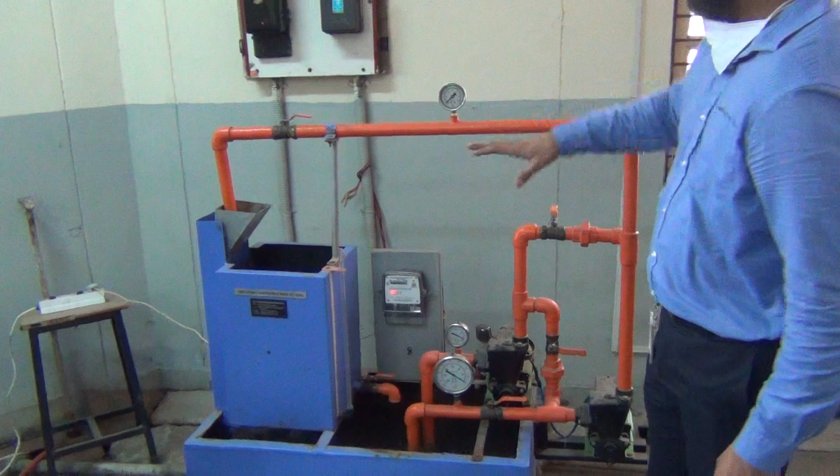System for single acting. This valve is open, this valve is closed, this valve is closed. The water is flowing in this pipe only. So this is a single stage centrifugal pump. So first of all, we can adjust the delivery pressure. So we can adjust the delivery pressure with this valve

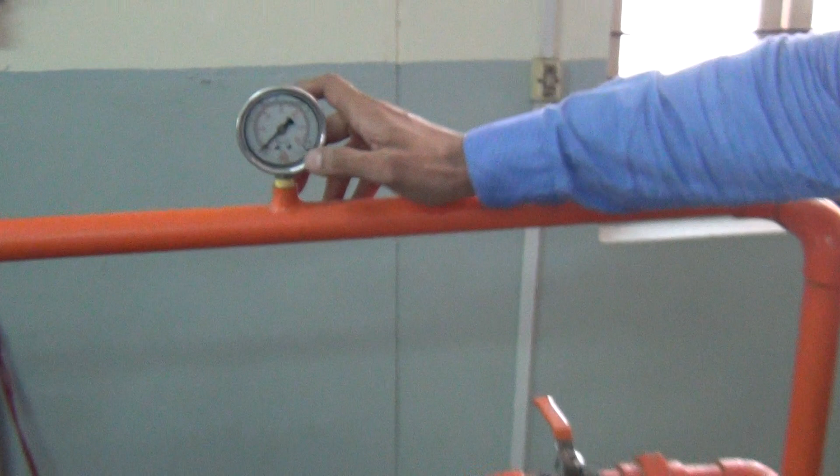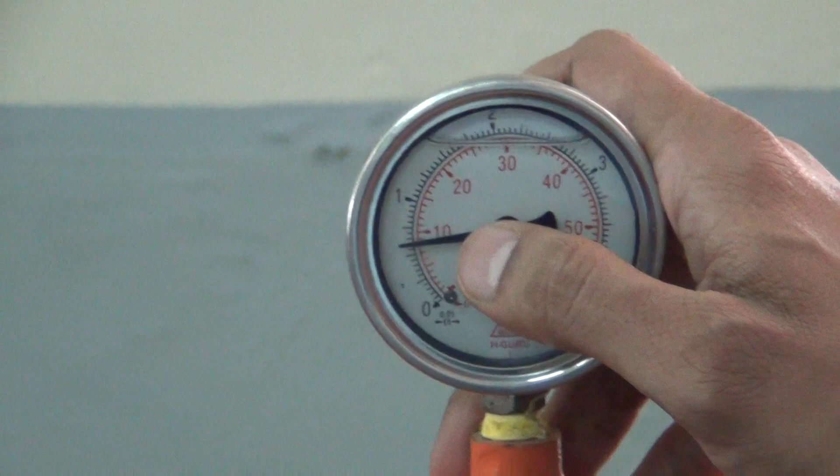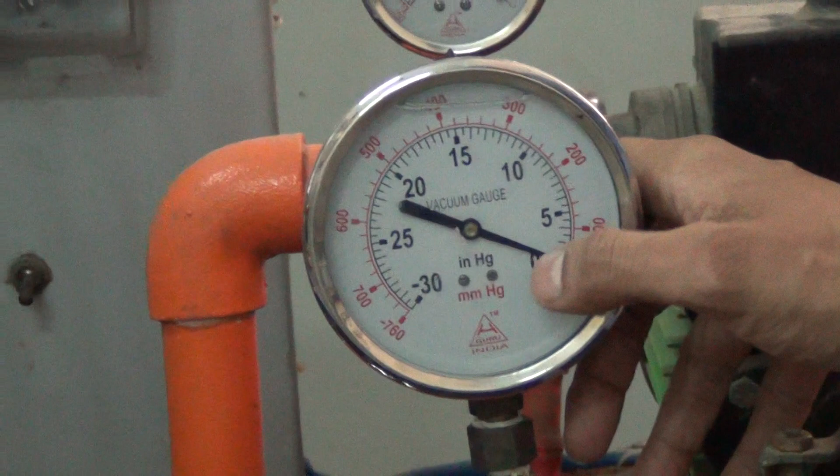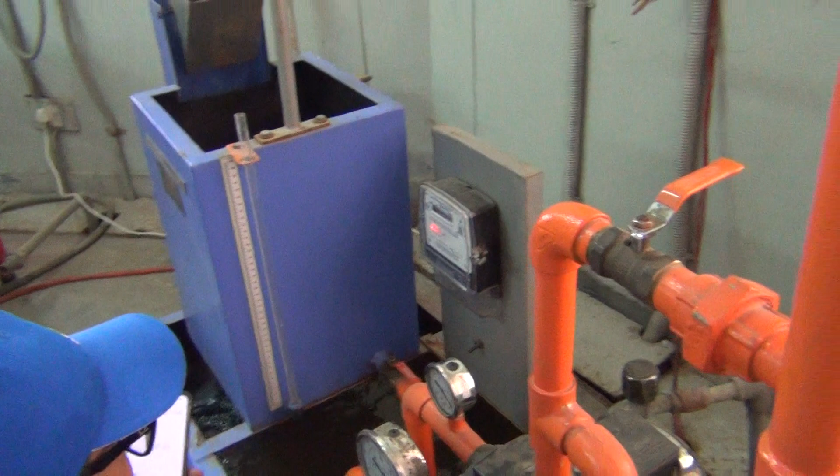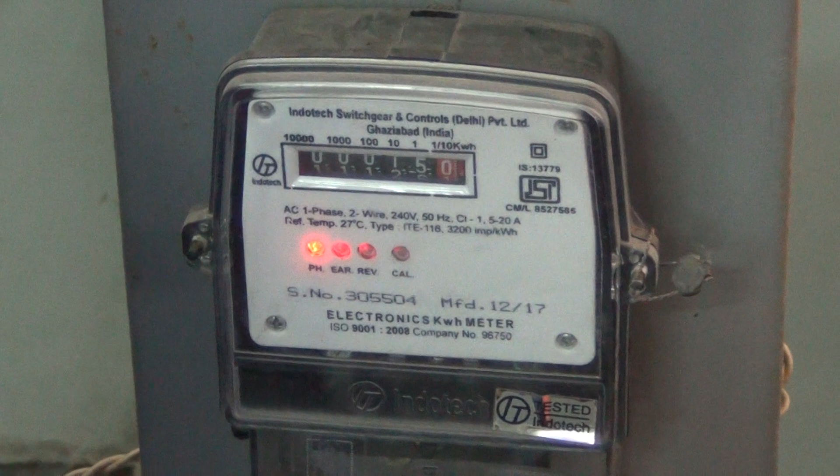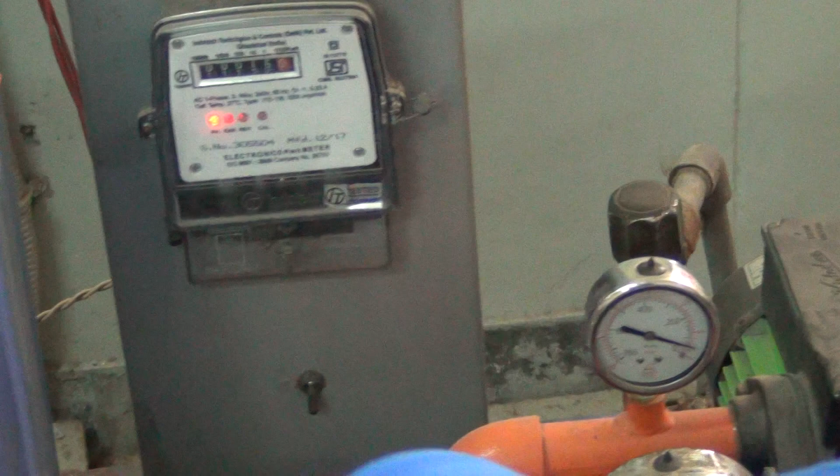Now we are measuring the time taken for 10 impulses. 30.25. Now we have to measure the time taken for 10 centimeter height rise in the measuring tank.

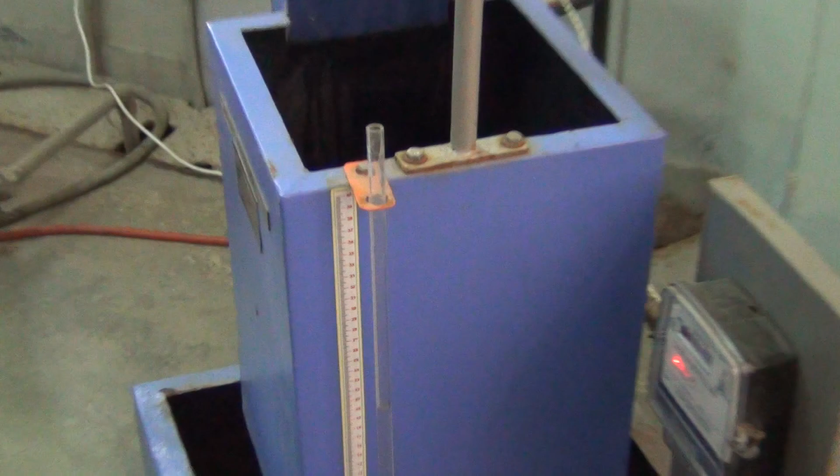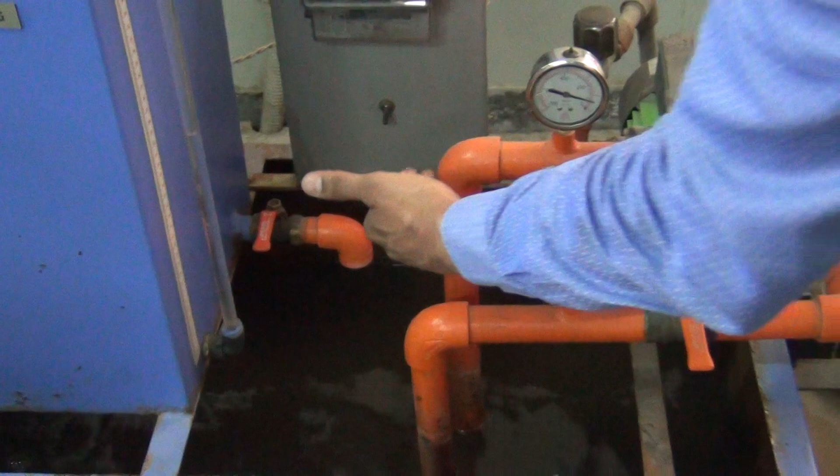In series, we can close this valve, we can open this intermediate valve. Now in this case, the water is sucking from this pump and the outlet of this pump is the inlet of this pump. Because we have already closed this valve, the intermediate valve is open. Now this system works as a pump in series.

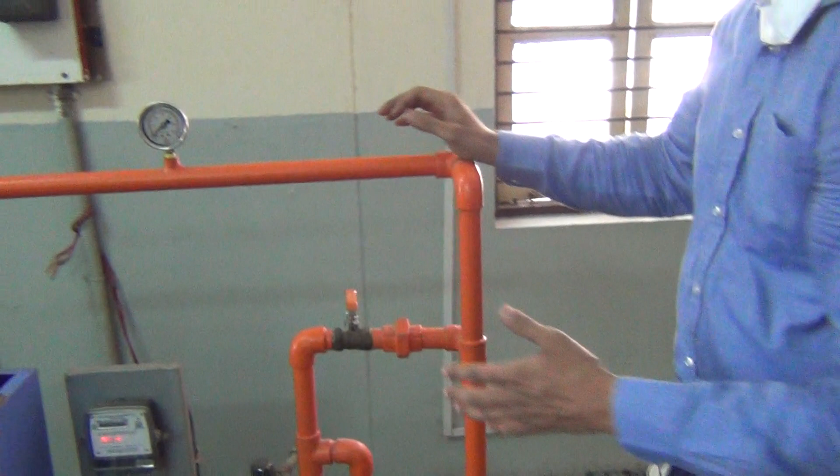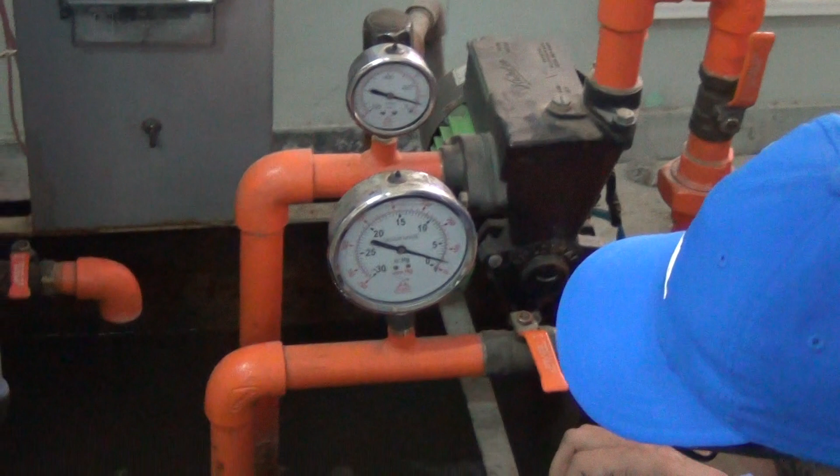So pump in series is used for high head. Means if we require the high head, we can use the multi-stage pump in series. So in this pump, we can adjust the pressure 0.5. Same delivery pressure, that is 0.5 kilogram per centimeter square. Vacuum pressure, that is

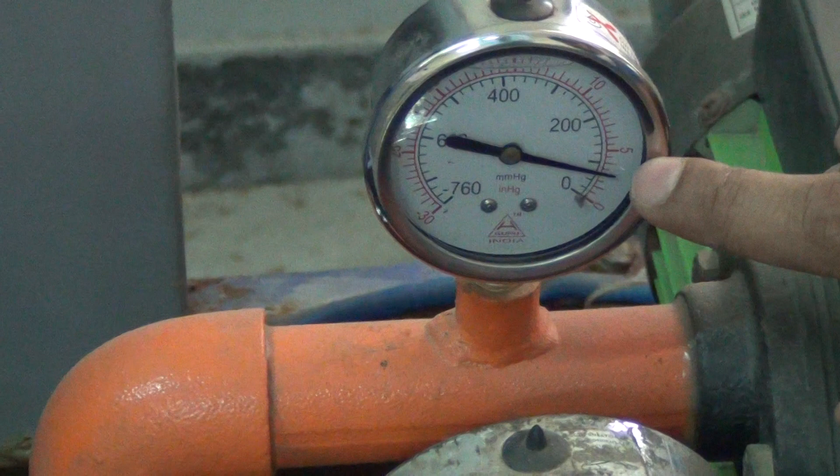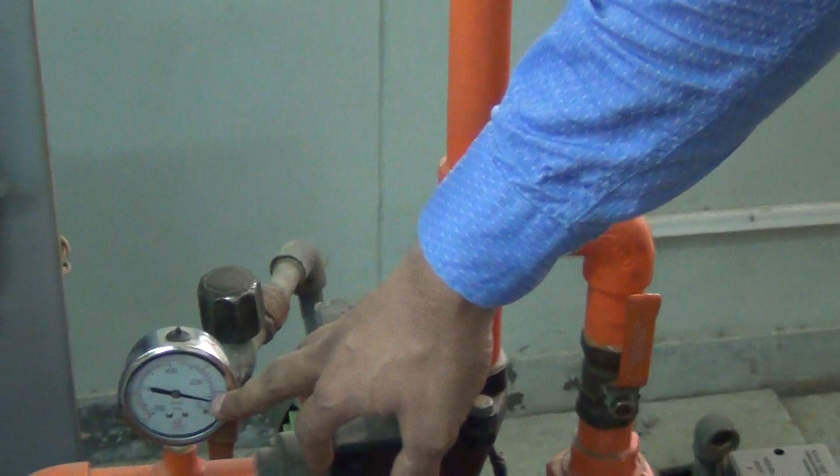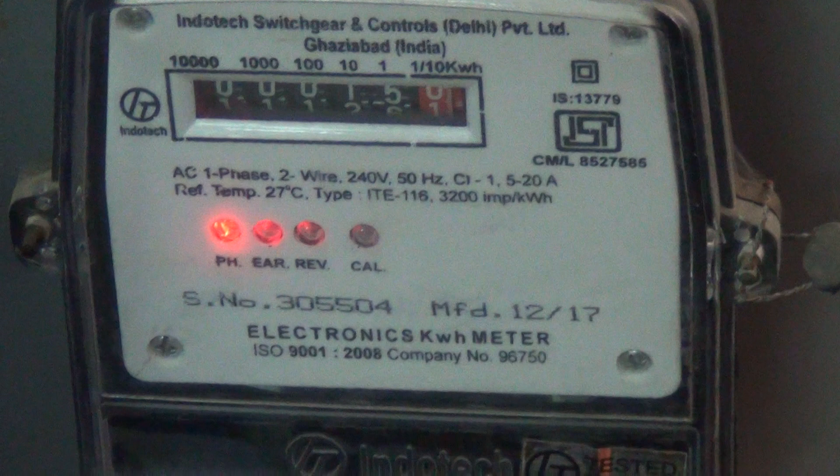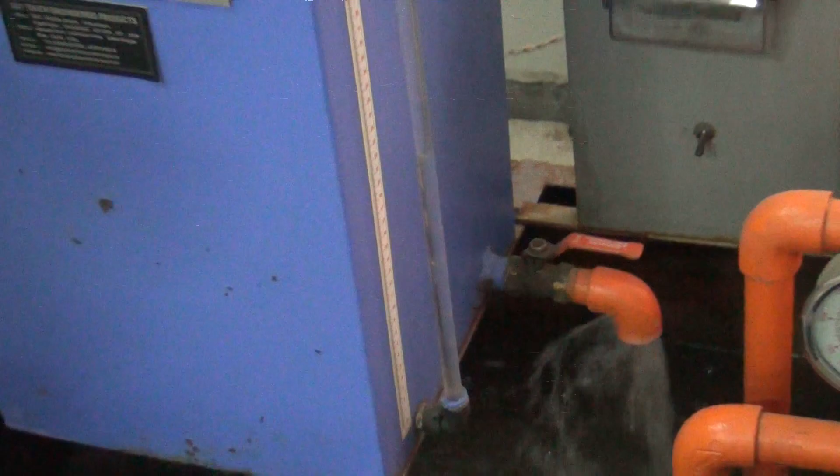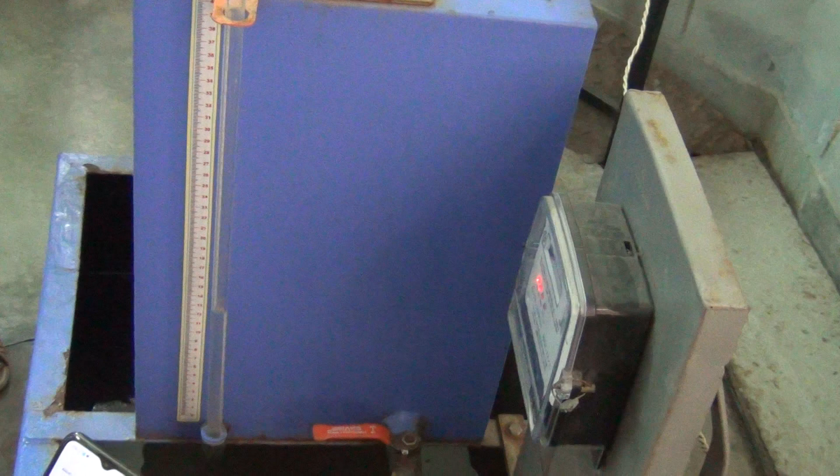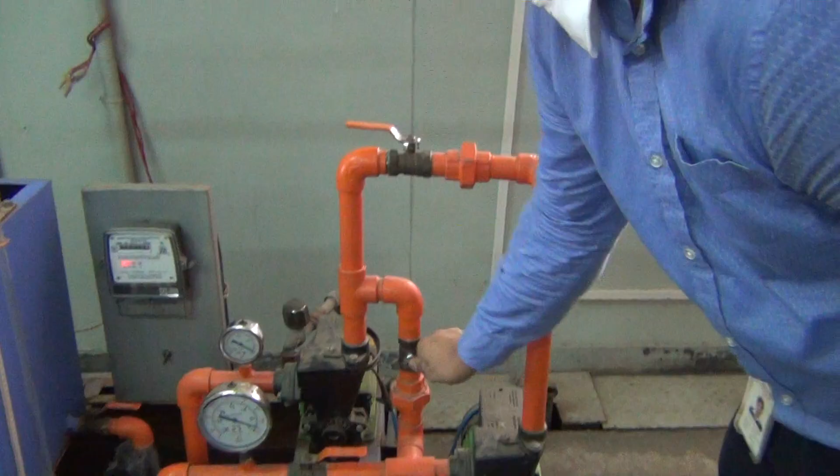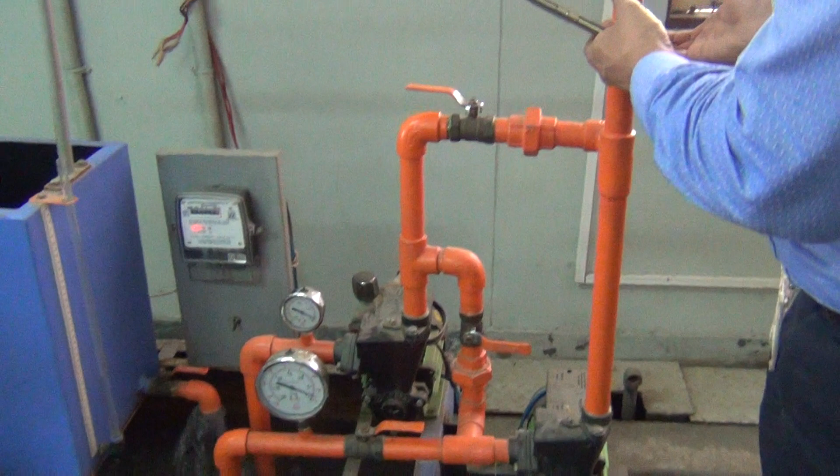And this valve is closed. In this case, this pump sucks the water from the sump and this pump also sucks the water from the sump. Then the combined discharge of both pumps comes here, then we can find out the discharge. Now we can again adjust the delivery pressure. 0.5, that is 0.5 kilogram per centimeter square delivery pressure.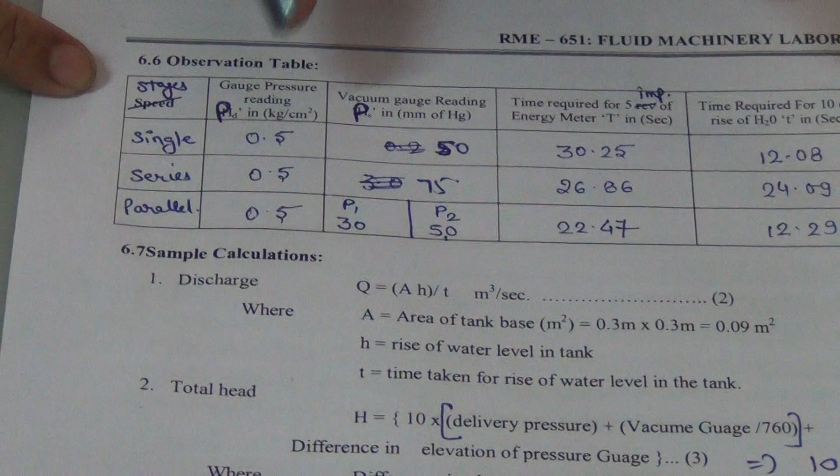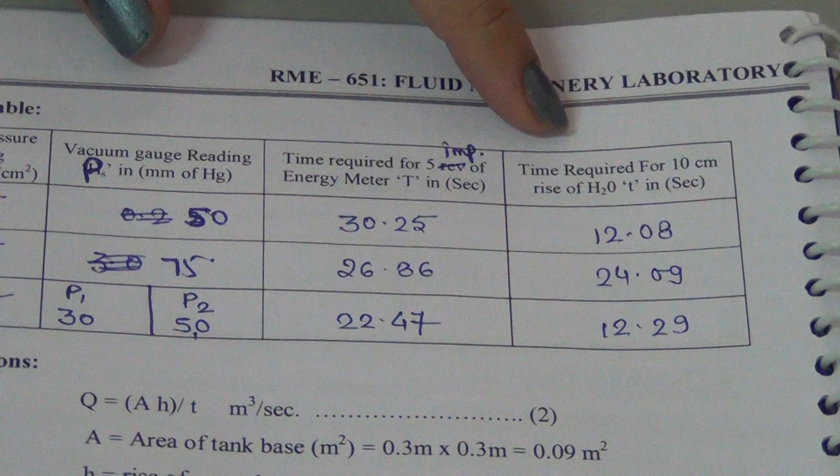So these are the readings. Centrifugal pump. Here the observation table consists of 4 columns. First one is gauge pressure, second one is vacuum pressure, third one is time required for 5 impulses of energy meter, T in seconds, and fourth one is time required for 10 centimeter height of water, that is small t in seconds. In the first column, as we know, we have gone for 3 readings.

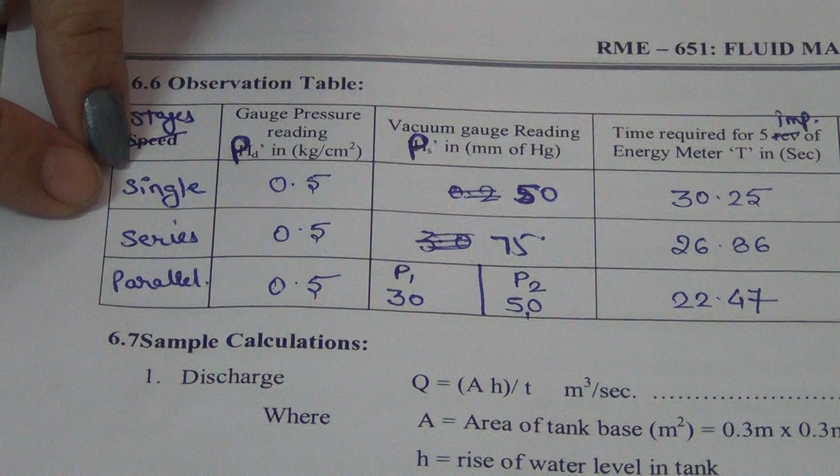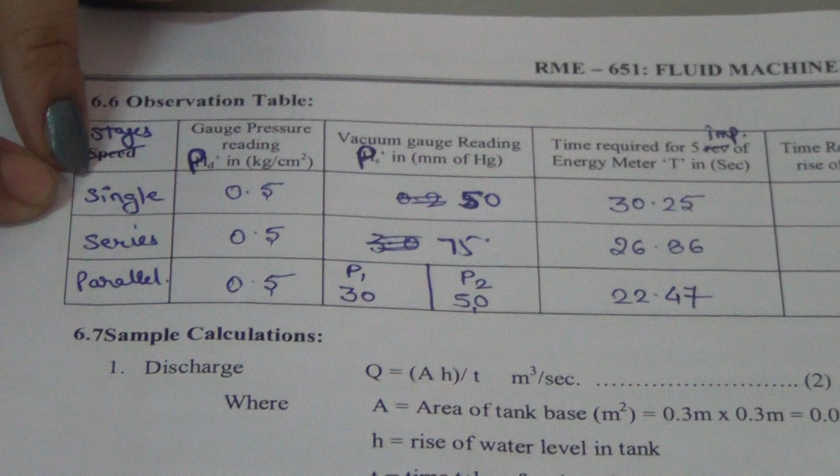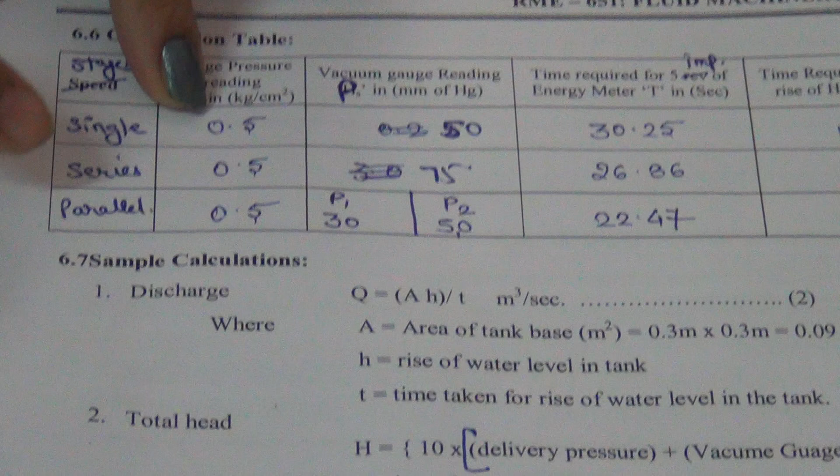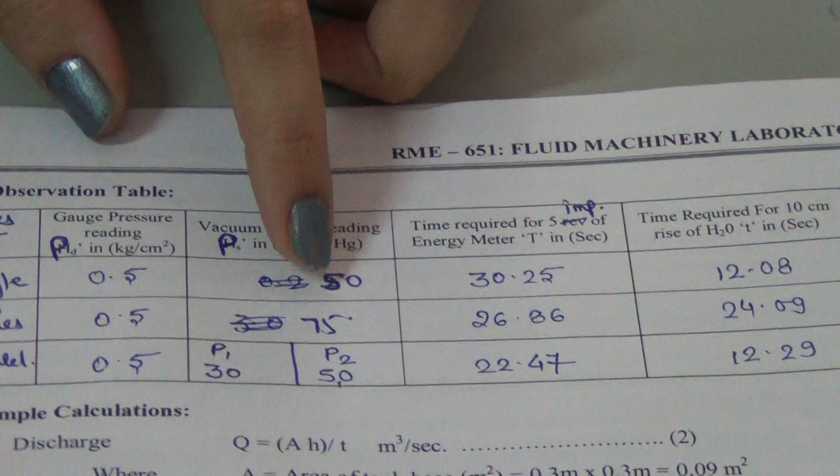First one is single stage, second and third belong to the multiple stage, which is subdivided into series and parallel connections. Initially we have gone for the single stage centrifugal pump. For this, the gauge pressure reading we have kept at 0.5, and this is constant for all 3 readings. At the delivery pressure of 0.5 for single stage, the vacuum pressure will be 50, for the series connection it is 75, and for the parallel connection, which consists of 2 pumps, it is 30 and 50 mm of Hg.

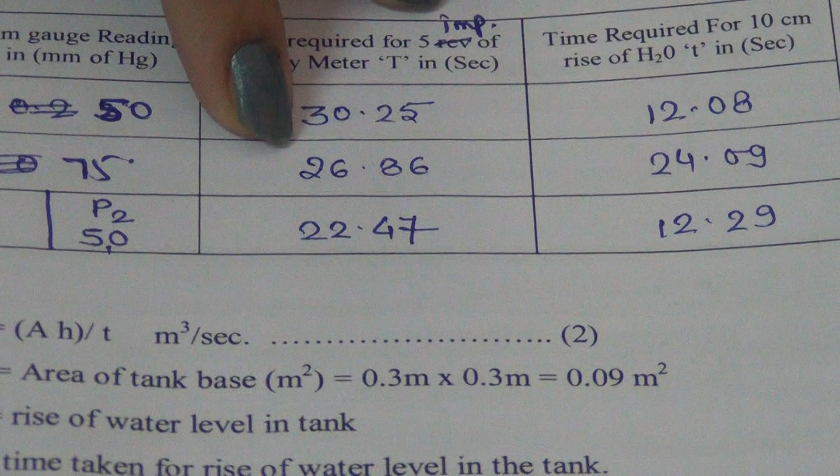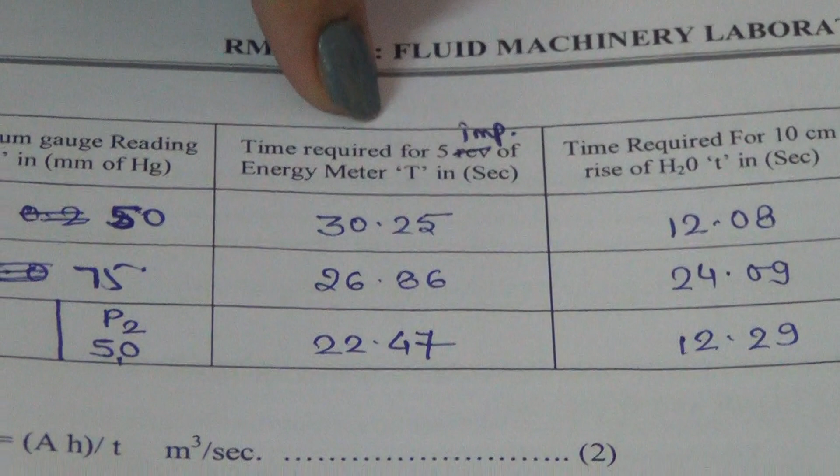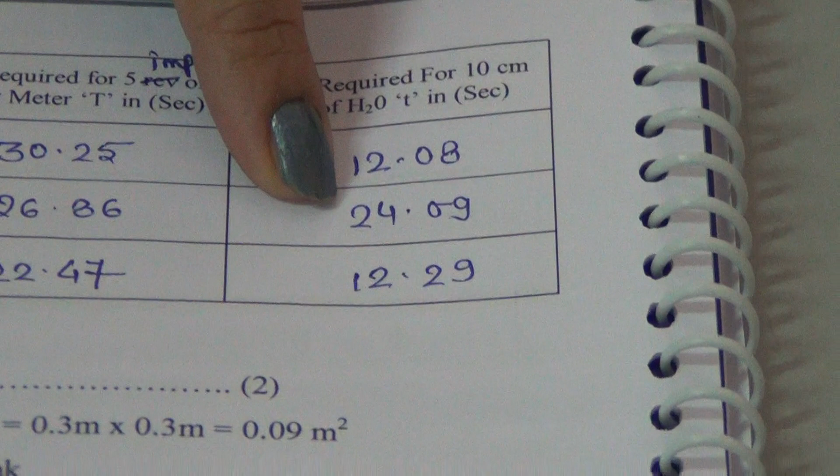Now the time required for 5 impulses of energy meter, that is T in seconds. For single stage the time is 30 seconds, for series it is 26 seconds, and for parallel it is 22.47 seconds. From this it is clear that the time required for 5 impulses is decreasing for the parallel connection. Moving further, the time required for 10 centimeter rise of water is 12 seconds, 24 seconds and 12.29 seconds for the parallel connection.

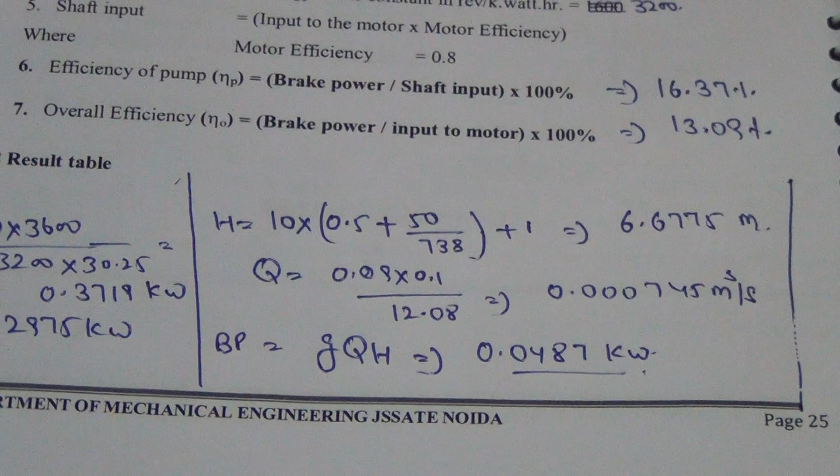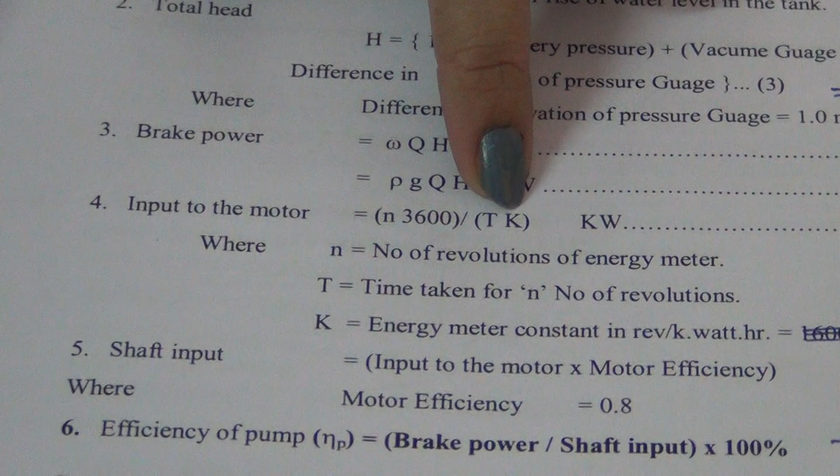This is the observation table, and after this the calculation is done. From here we get the value of input power, shaft power, total head, discharge and brake power. You have to calculate 4 things. Initially you will go for the input power. Input power is N into 3600 divided by T into K. And from here you will get the value of input power. Further we will go for the total head.

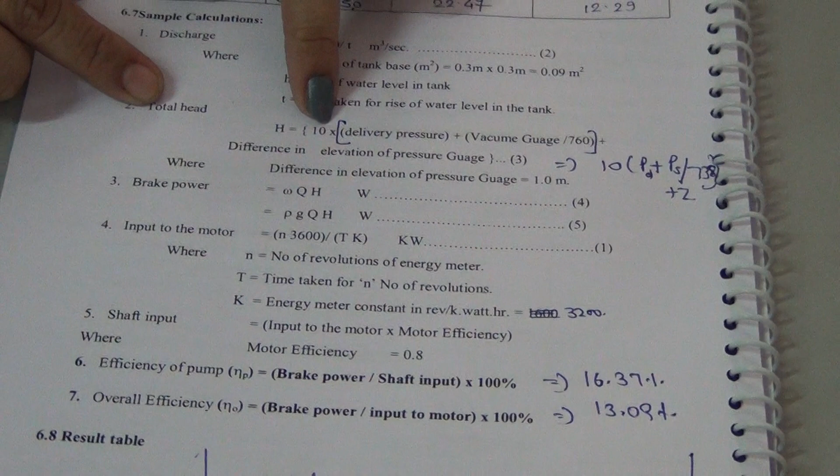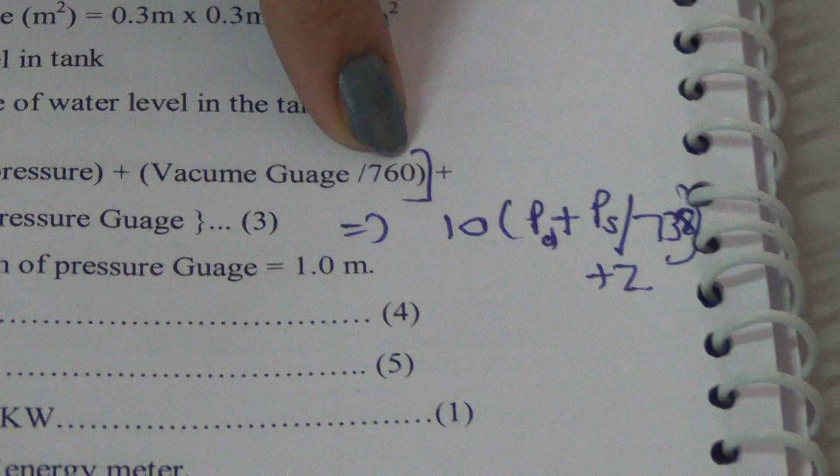Total head can be calculated by the formula H equals 10 into delivery pressure plus vacuum pressure divided by 738. Here it's 760, but when you are doing the calculation, you have to take it 738. From here you will get the value of total head equals 6.6775 meter. Then you will go for the calculation of the discharge.

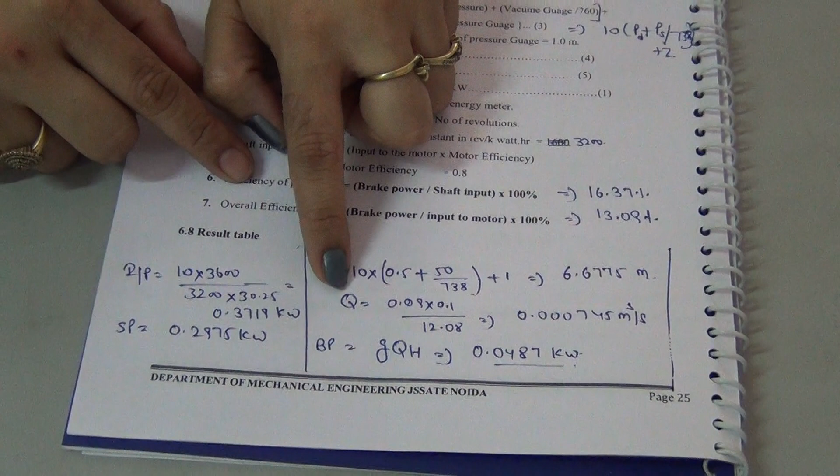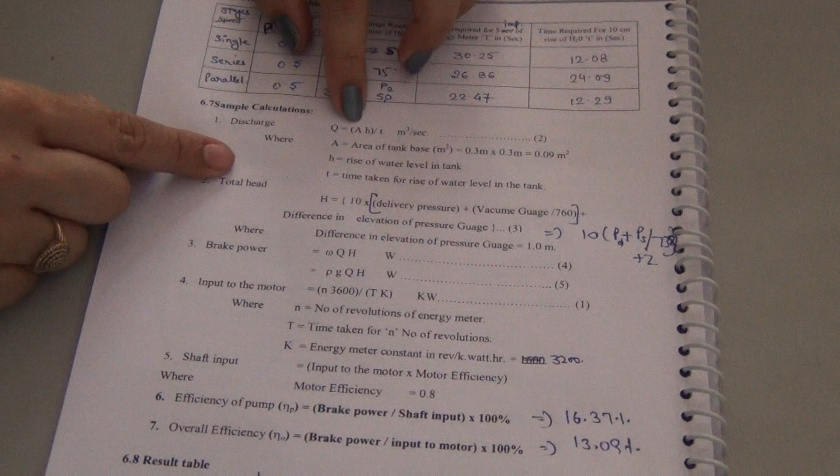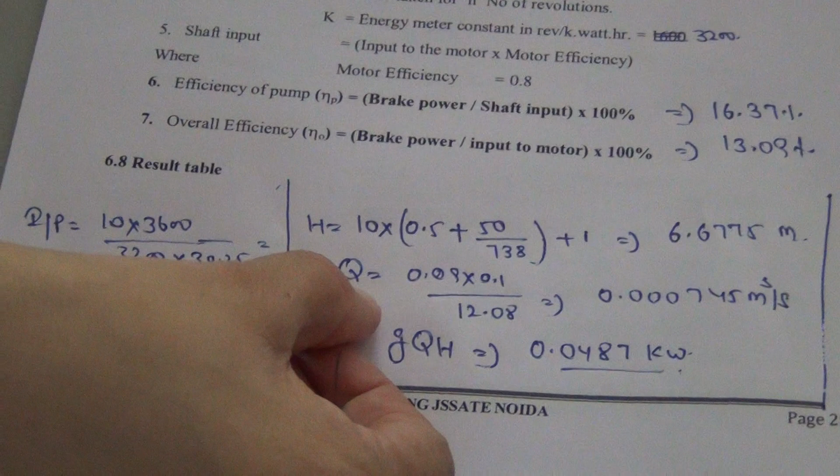As we know, Q is AH by T. Area of tank is 30 into 30, so the area is 0.09 meter square, whereas H is 10 centimeter, that is 0.1, and the time for the first reading is 12.08. From here you will get the discharge, 0.000745 meter cube per second.

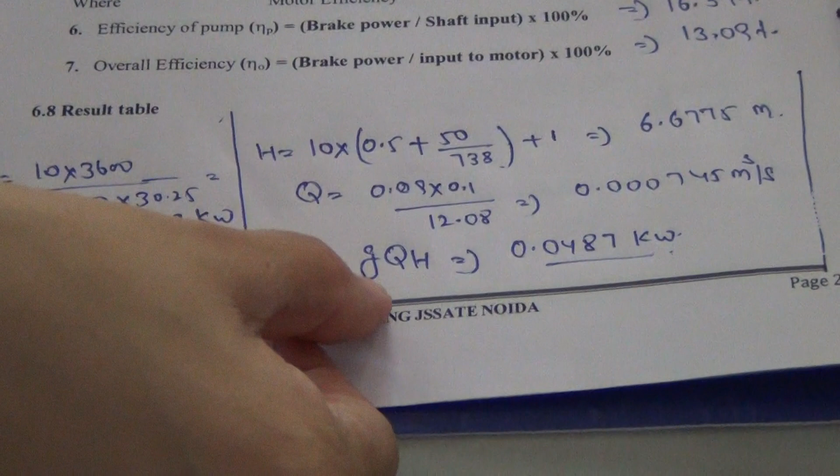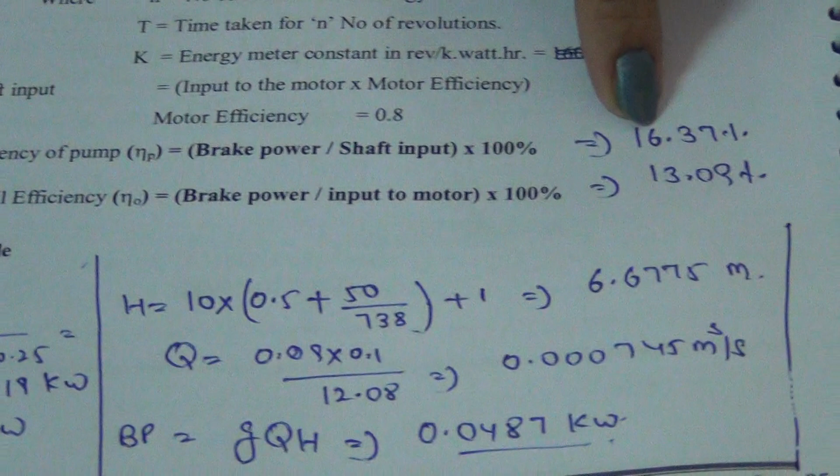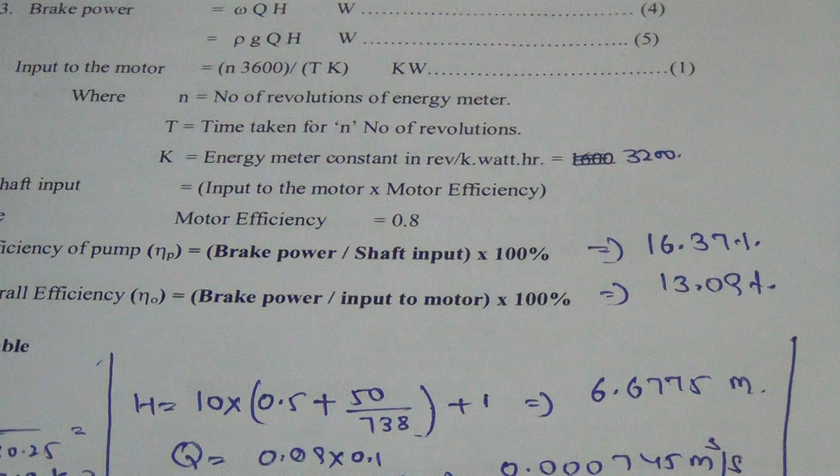Further we will go for the shaft power, and then the brake power. Brake power is nothing but GQ into H. You will get the value from here, and then you will go for the efficiency. Efficiency is brake power divided by shaft power. You will get 16.37%, and the overall efficiency is brake power divided by input to motor, where you will get 13.09%. Similarly, you can go for the series connection and parallel connection.